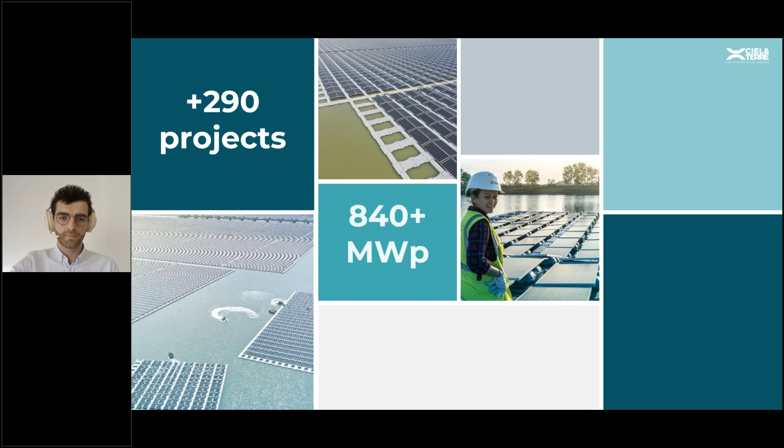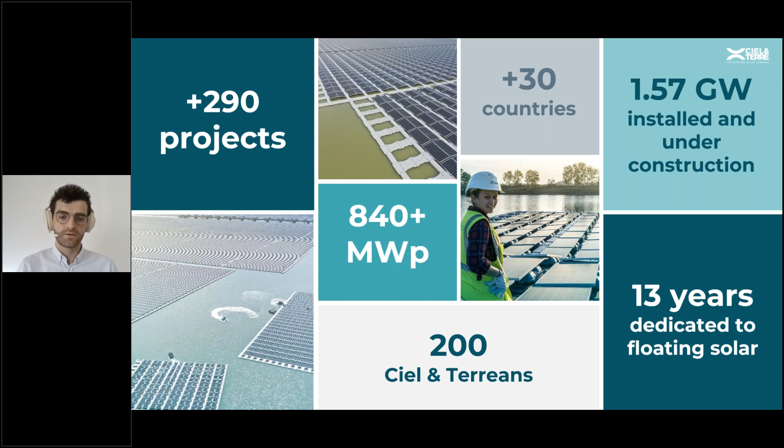Just a few numbers to give you a rough idea of Ciel Terre's expertise: we have around 290 projects installed so far over more than 30 countries, for a total capacity of 840 megawatts. Today, with installed, under-construction, and contracted projects, we reach 1.6 gigawatts so far. Around 200 people are involved in daily activity at Ciel Terre, and we're proud to say we've dedicated 13 years of our time to floating solar.

So now let's move to the first part of the presentation, which is the market observations that we've seen.

The first observation concerns the pond itself, or the basins, as we can say, and it's about the unique character of it. Especially with ponds, you are looking at different site environments. And despite specific characteristics, we can gather those ponds into 4 different categories.

First, we have the static freshwater bodies, which is the historical FPV application, where you could have no waves and freshwater. It refers mainly to irrigation ponds and fish ponds. On this specific segment, Ciel Terre has 12 years of experience and nearly 345 megawatt peak installed.

Next is inner waters, ponds a bit bigger than the one we just mentioned, where we have some dynamic effects as well, with waves coming to the pond and to the FPV array. It refers to quarry lakes, larger fish ponds or irrigation ponds, water treatment or storage ponds. On this segment, Ciel Terre has 10 years of experience and more than 330 megawatt peak installed.

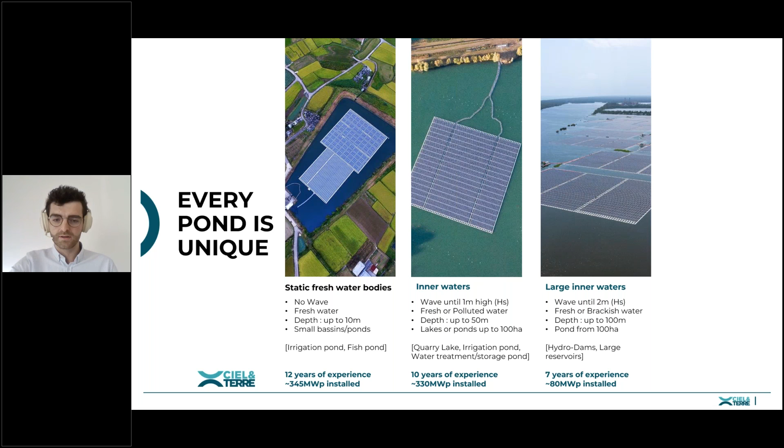Next is large inner waters. It's the same as inner waters but even bigger, with ponds starting from 100 hectares, with more challenges at some point. This represents all the hydro dams and large reservoirs, where basically you could have some brackish water as well. On this segment, Ciel Terre has 7 years of experience and nearly 80 megawatts installed.

Last but not least is nearshore protected - all the protected bays from offshore conditions, with sea lagoons that are open to salty water, where we can find some waves coming at a bigger scale on the array. On this segment, Ciel Terre has 3 years of experience and nearly 90 megawatts installed.

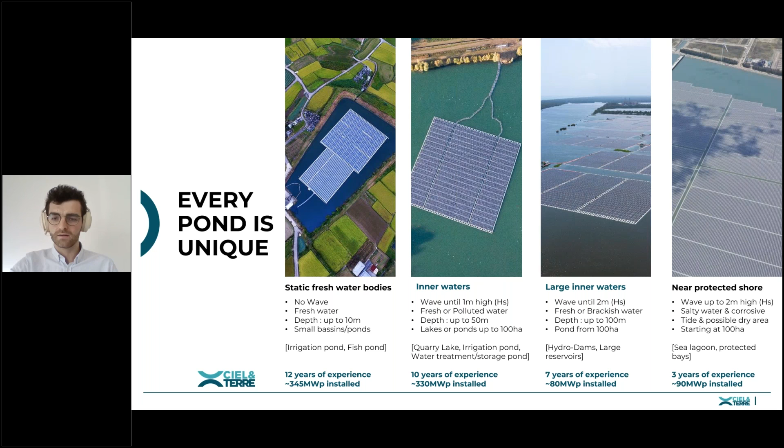Now moving on to the second observation, concerning the trend on the PV side. I'm not going to cover the full history of solar PV cells and solar wafer cells, but I'll give you the latest updates concerning that.

Back in 2010 and 2012, we were considering M0 and M2, which were 156 millimeter cell sizes. This brought 2 types of PV: one was 60 cells arrangement, the other was 72 cells arrangement, which later became half-cut cells - 120 and 144 half-cut cells. At the real beginning of standardization, PV were 1.6 meters by 1 meter, up to 2 meters by 1 meter with the 72 cells.

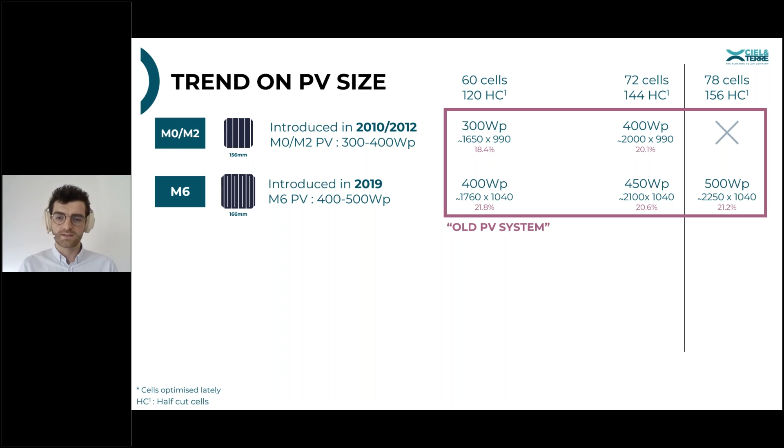Moving on with a few more improvements in PV arrangement and aspects, M6 arrived in 2019 with PV reaching 500 watt peak, with a new format coming onto the market with 78 cells. At that time those PV were considered quite new, but today they're considered old PV systems, as they're not expected to be installed on industrial scale for larger projects.

We're moving now to M10 and M12, introduced respectively in 2020 and 2021, with even bigger module capacity and the same amount of cells, but the cells increased in size, so the PV itself increased in size. For M10, with 78 cells, we have nearly 2.4 by 1.1 meter PV size, around 2.7 meters square, and the PV capacity can reach 620 watt peak for the latest one.

Later with M12, we have a new arrangement of cells on the PV, representing 66 cells. With this PV, we're able to reach today 700 watt peak for a module. At that point the panel also increased in width and length, becoming 2.4 by 1.3 meters long.

These panels are considered a new PV system, so they'll be used on utility scale projects, FPV project scale, and are the main focus of today's presentation as they'll be able to be installed with the solution provided by Ciel Terre.

One of the main drivers here is cell efficiency. Before, with the old PV system, we were around 18 to 20% maximum, and today we are around 21 to 22% efficiency. The higher the efficiency, the lower the LCOE will be - so the better for the PV industry at this point.

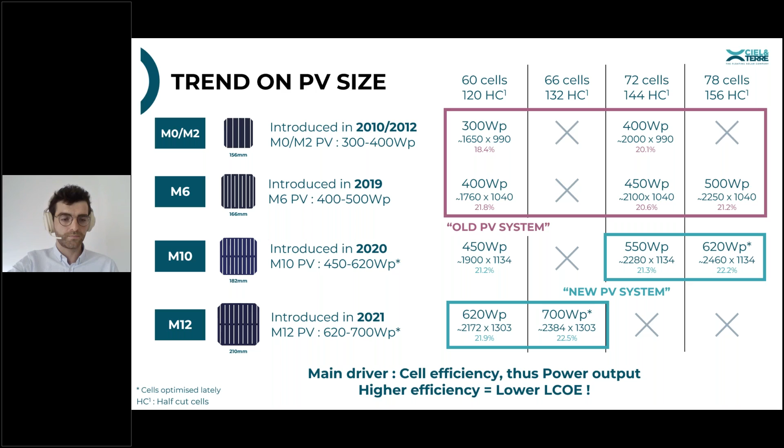Next point and next observation is concerning the FPV system overall and its variety of systems. We have seen multiple types of floating solar systems arriving onto the market, flourishing, and going into diverse kinds of directions. But at some point, the main objective is the same: setting PV power plants above the water surface. For that, let's have a look at this overview of different types of systems with specifically different descriptions and characteristics.

The first one is the float-to-float segment, which is a float combining with other floats, providing a flexible structure with waves and a salty environment, and can lay easily onto the ground.

Then we have pipes and hybrid systems, which can be described as a mix of flexible and rigid structure. These bring as well buoyancy spread and walking stability.

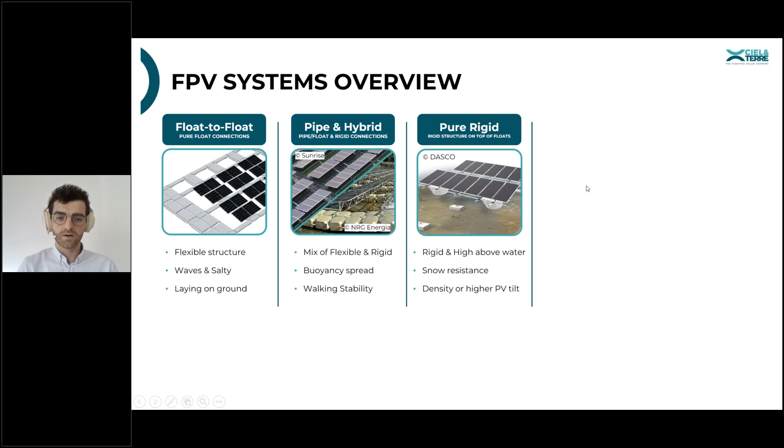The third segment is pure rigid, which is a float set onto a rigid structure, which has high distance above water, can provide snow resistance and density, and has a higher PV panel tilt.

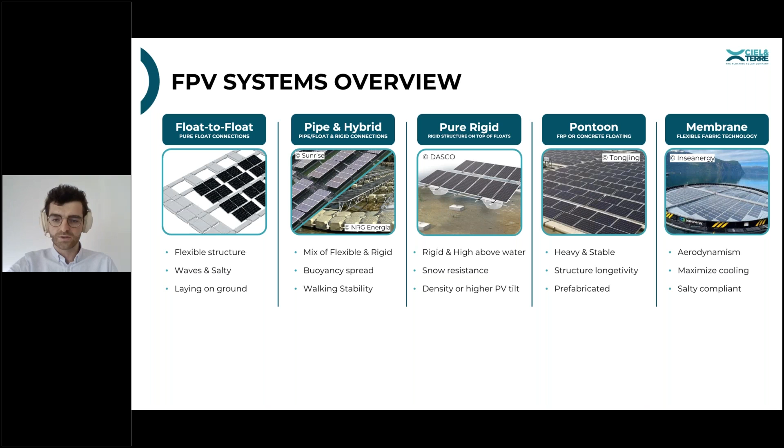Based on those segments, we are able today to give some numbers about the FPV cumulative capacity installed worldwide. Based on internal Ciel & Terre data and consolidated data from third parties, mid of this year, 2023, the overall cumulative capacity was reaching 5.7 gigawatts, counting over 950 projects.

If we go deeper into this number, taking into consideration those 5 different segments, today float-to-float is reaching 70% of the overall market share, followed by pipes and hybrid with more than 16%, and third on the podium we have pure rigid.

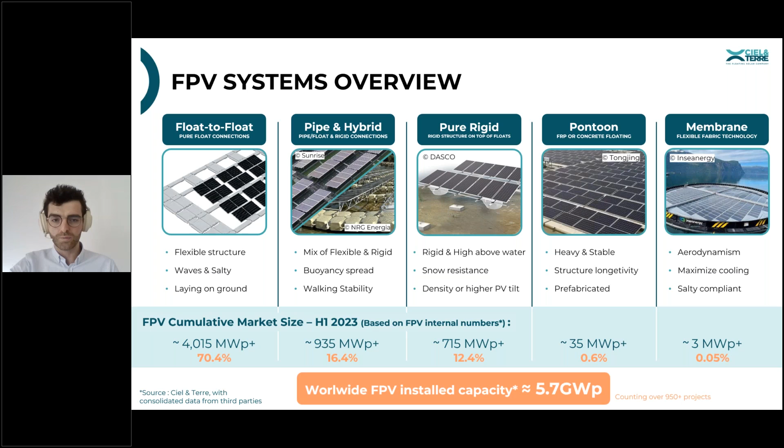With these 5 different segments, we are able as well to have a look at the evolution and how the technology evolved during the time. We'll go back to the first year mentioned in this graph, 2011, where the FPV market was below 1 megawatt, and still at that moment we had several types and kinds of technology on the market.

Later on, in 2015, the market reached 70 megawatts, with more technology coming onto the field. We reached 6 technologies for float-to-float in 2015, pipes and hybrid with 5, rigid was 5, pontoon 2, and membrane still 0.

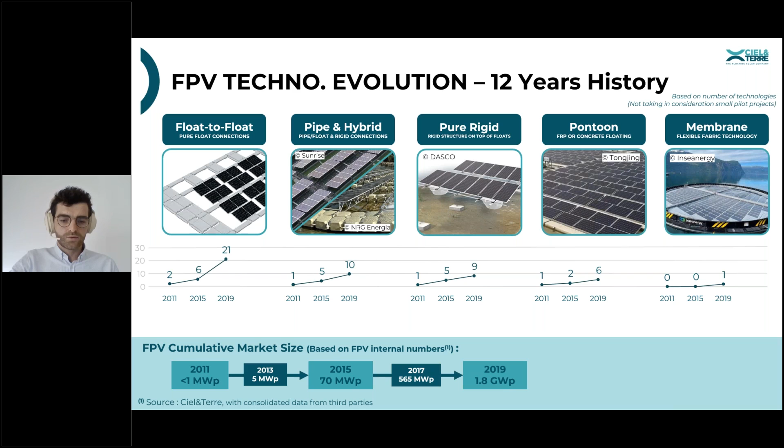Later on, in 2018, it was a milestone year for FPV as it reached and then exceeded 1 gigawatt. PV experts started to say that FPV is the new application for PV, and that it will become the third pillar of the PV industry.

And today, mid-2023, here are the numbers, following the trend we've seen so far from the early beginnings, with a lot of new technology arriving on the market, but not with the same return on experience.

Tomorrow, based on DNV information published in April last year, the capacity in 2025 is expected to reach 10 gigawatts at some point. This shows that FPV is showing market dynamism, but in terms of technology and reliability, that's the main point of discussion.

Because once we look at the actual structures and the floating solar experts, there is always a gap, especially talking about anchoring, and that's why Ciel & Terre has the main expertise on the field. I'll outline it a bit later during the presentation.

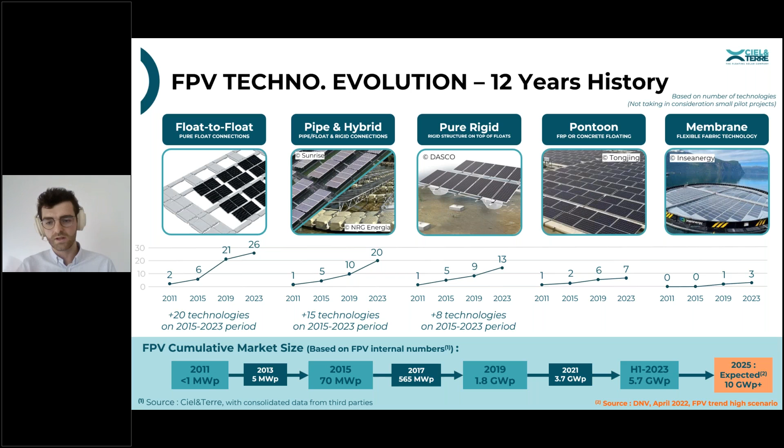Now let's move on to the actual solution we can provide today, considering where we started. It all started in 2011 with the Classic version, the first industrial scale FPV structure with a fixed tilt of 12 degrees. At the end of 2011, Ciel & Terre reached 3 projects installed with this technology.

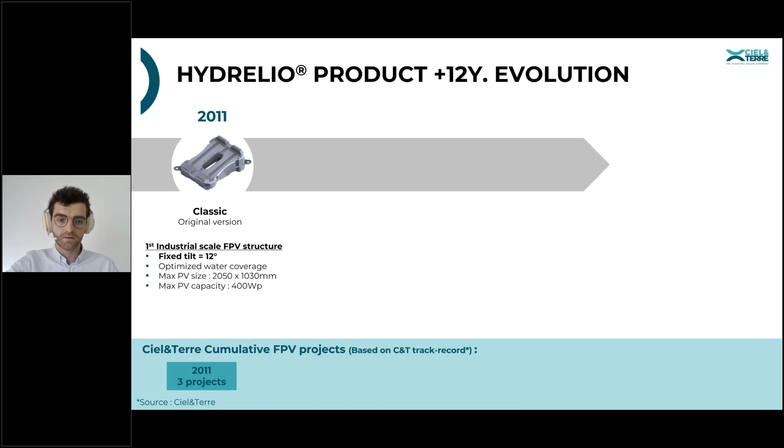Later on, the Equato version was unveiled on the market for equatorial regions, bringing a fixed tilt of 5 degrees. By the end of that specific year, we reached 30 projects installed.

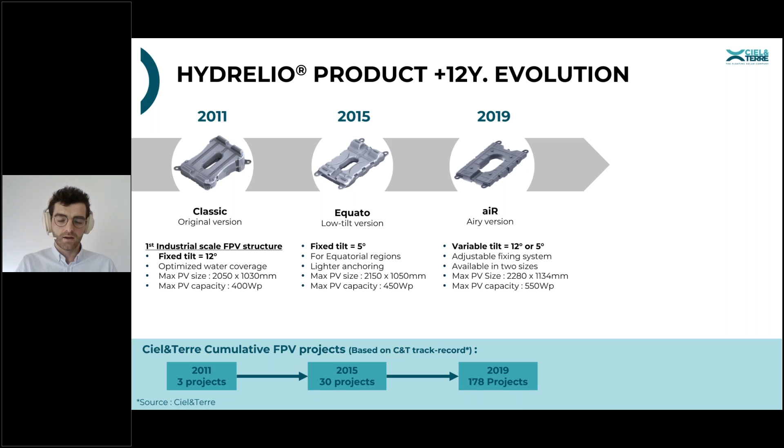Later, it was replaced by the Air version in 2019, which is a variable solution with variable tilt and adjustable fixation that can cope as well with M10 standard PV size. And at that time in 2019, the number of projects was reaching 170 plus, mostly installed in Asia.

Today, we are proud to propose the new, most versatile option, which is Optim floats. It has variable tilt size, variable float size, and is adaptive to specific M10 or M12 PV modules. The number of projects grew significantly in recent years, reaching around 290.

Talking about track record, starting in 2011 with Classic, the track record today is 430 megawatts, though it's no longer commercialized because it's been replaced. Equato was 25, and Air is still 385 megawatts. Currently in the pipeline with the Optim solution, there is more than 730 megawatts peak.

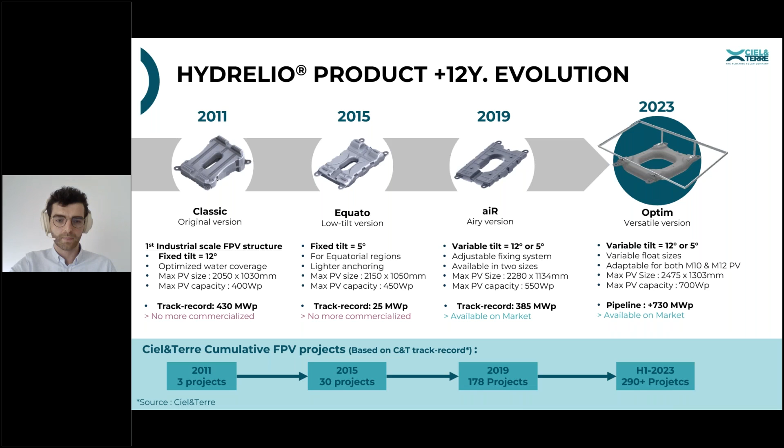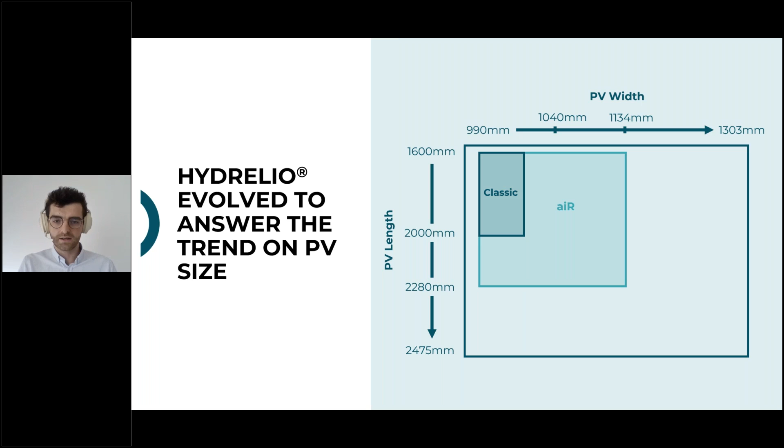After Air came to the market, here is the compatibility range for the Air product with specific PV sizes. Now that we're moving to M10 and M12 PV sizes, Optim is the solution, and it can cope with this very large and very long PV found on the market.

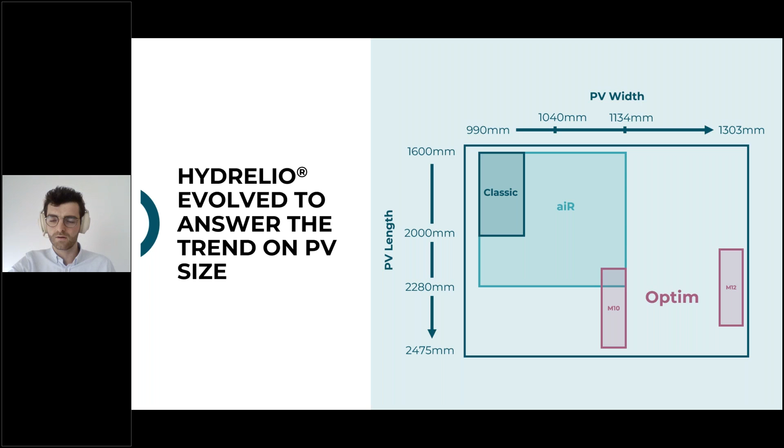But what's behind Optim? Let's have a look together.

Optim System is a float-to-float technology based on 12 years of experience and evolution, with strong track record and bankability. It's a float-to-float system combining several types of floats with PV installed in landscape mode, adjustable in terms of angle — the module can go from 5 to 12 degrees.

It can cope with different types of environments, combining several floats. It's flexible to adapt to inshore and nearshore conditions with waves as well as wind that can blow quite significantly at the back of the PV. It can reach resistance up to 210 km/h, which is needed in some typhoon areas where there's a bigger amount of pressure requiring a specific solution.

It can cope with PV modules from M10 to M12, with PV up to 700 watt peak, and will for sure gain efficiency to reach 800 watt peak.

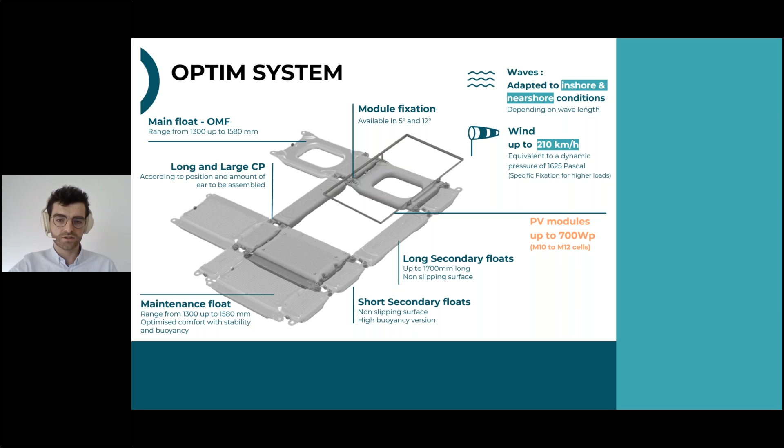It can also be easily configured in several rows, a concept brought back from 2015 when Equator arrived on the market. We place one maintenance column every 1, 2, or 4 rows of PV — that's what we call the several-in-a-row configuration.

It can adapt to specific temperature ranges as well as snow load, especially in some regions, and it can cope with corrosive and UV exposure in specific challenging environments.

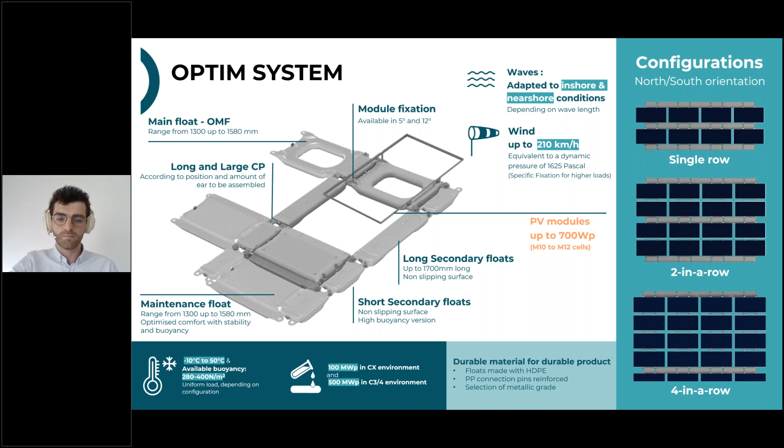One last part is about the material, which is really important at Ciel & Terre, as we ensure the product can be reliable and installed for more than 30 years. So we have a close look at what we select as raw material.

Talking about evolution, Optim features a new floats overlapping design to make the maintenance column better for safety.

It brings Hydrelio float-to-float technology closer to hybrid and rigid working stability, while keeping a high degree of flexibility to cope with waves. It allows better weight repartition on the maintenance column, as well as ease of maintenance and operation.

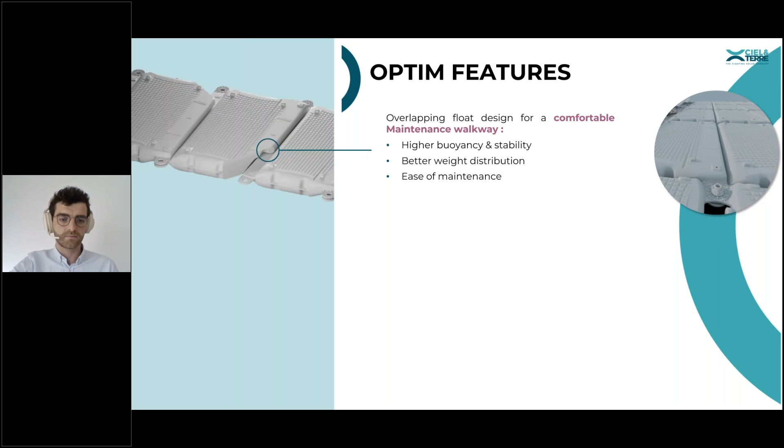Columns can be easily added to the power plant without compromising the overall array density, while adapting to heavier string inverters placed directly onto the floating array, or DC boxes that can be placed the same way on this specific maintenance alley.

This Optim paves the way to an upgraded float-to-float structure, with the latest PV compatibility from M10 to M12, with latest PV weight compatibility up to 38 kg, with improved thickness repartition during the blow molding process, with better safety as mentioned with the maintenance floats concept, and with adaptive floats to cope with PV tilt and dimensions.

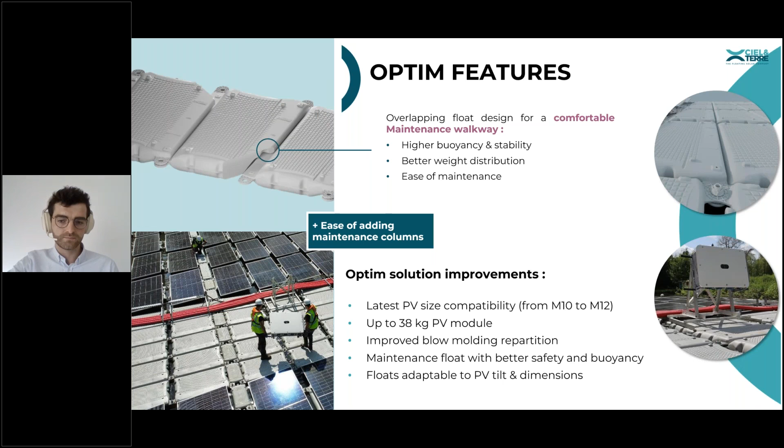Now that we've talked about the solution for the market, Ciel & Terre adapts its product to market trends, improving the system, but also adapts to site constraints. I want to hear from you about what you've faced during FPV project execution. So here is a quick poll to understand where you find the different limitations.

Thanks for voting. I see that site constraints came first in the poll, followed by anchoring issues and environmental issues. It's true that those specific problems need to be handled with care, and Ciel & Terre is making everything possible to address those points. We'll see specific cases now with the presentation.

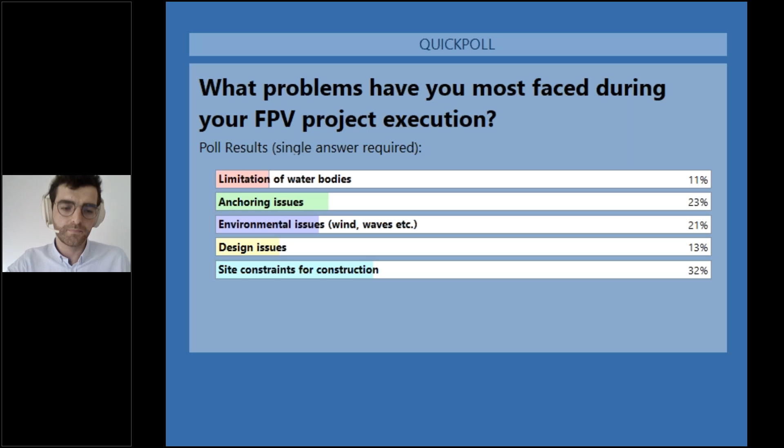As mentioned, we need to overcome some site challenges, and this is the last part, starting with anchoring. Site characteristics are essential to lead to unique designs, and at some point to innovate and think out of the box, as you'll see during the presentation. At times we can provide a unique anchoring design to the customer depending on the site requirements.

Let's have a look at the Maiwelt Project in Germany. It was installed in 2019 on a quarry lake, reaching a capacity of 750 kilowatts. On this specific project, Ciel & Terre's scope covered project engineering, supply and procurement of the floats and anchoring, as well as construction.

Challenges on this specific pond were that the quarry was still in operation, so the location of the power plant mattered a lot, as we didn't want to interrupt the actual activities on the lake. Second was the depth of the reservoir, which was 40 meters at the FPV location, and at that time, for a project of this small capacity, it was quite expensive to install anchors at the bottom. Last was the impossibility of installing bank anchoring on the west side, as quarry activity was still running specifically on that part of the pond.

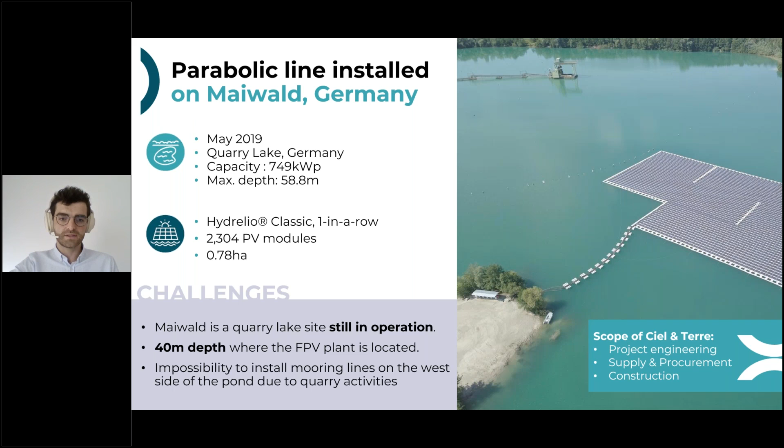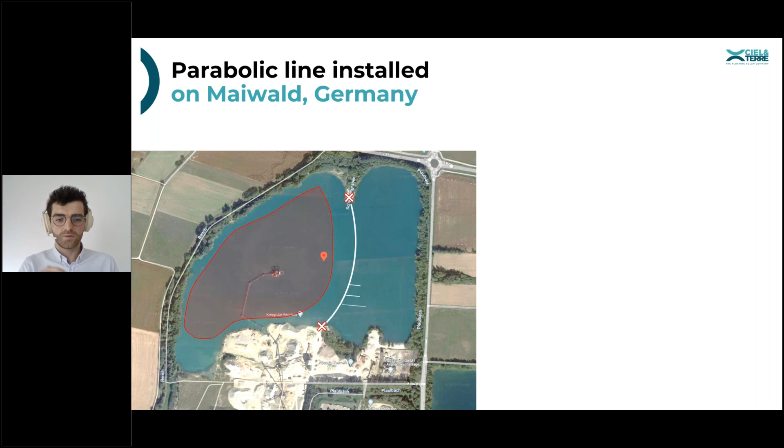So we came up with a new type of system called the parabolic line. The concept is that we have a main line set between two anchor points, and bridle lines that connect the main line to the floating array's anchoring system.

This brings several advantages. First, the actual solution avoids disrupting the activities, meaning we didn't need any bank anchoring or bottom anchoring specifically on the west part. It required fewer anchoring points, as you can see on the screen. It was quite quick, so there was no impact on the installation duration. And depending on soil conditions, it could be less expensive than traditional mooring. That said, a design like this must be adapted to site constraints and construction feasibility. It looks simple on the screen right now, but it's more sophisticated, involving specific simulation and calculations.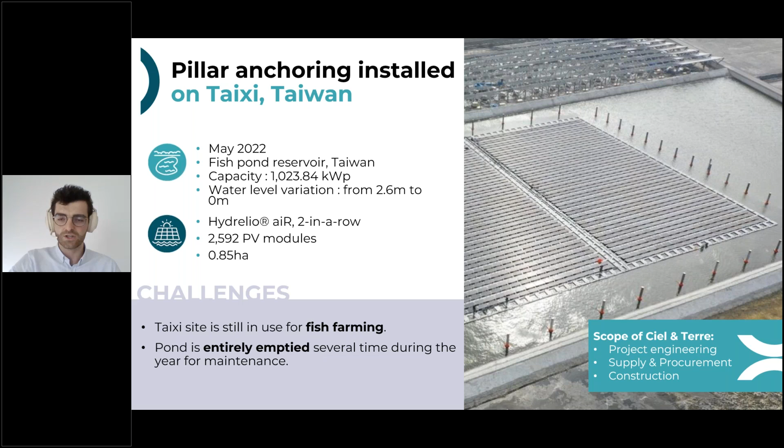On this specific project, the challenges were that it was still in use by fishermen catching and harvesting fish, so part of the pond couldn't be used for the installation of the floating power plant. Second, the pond could be entirely drained for several reasons, such as maintenance, operation, or dredging. Last, the banks were made of concrete and couldn't be used for the anchoring design of the power plant.

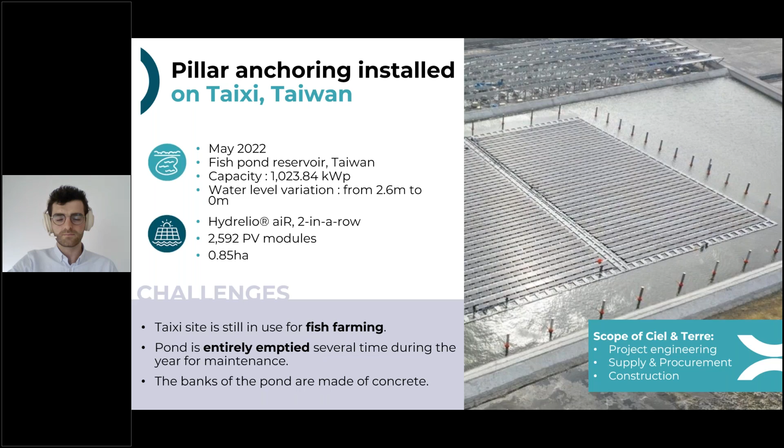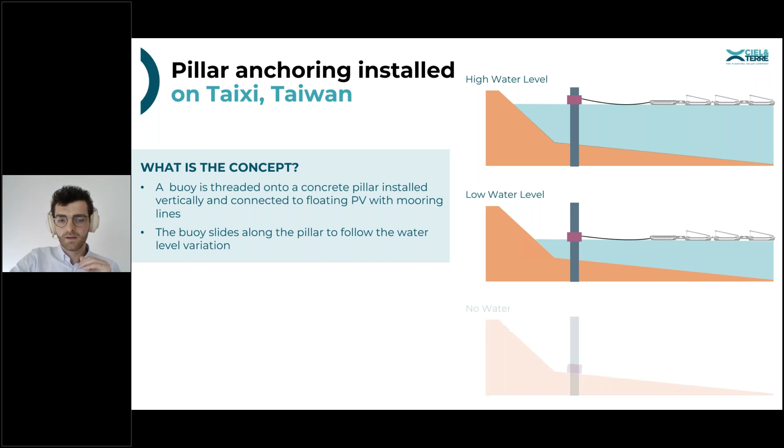So what we brought to the table here is called pillar anchoring, which is a concrete pile set vertically into the ground, on which we have a buoy that adjusts to the water level and connects directly to the anchoring equipment on the floating solar array. The buoy slides along the piles to cope with water level variation, and it can even go to no water level, as it strictly follows the water elevation.

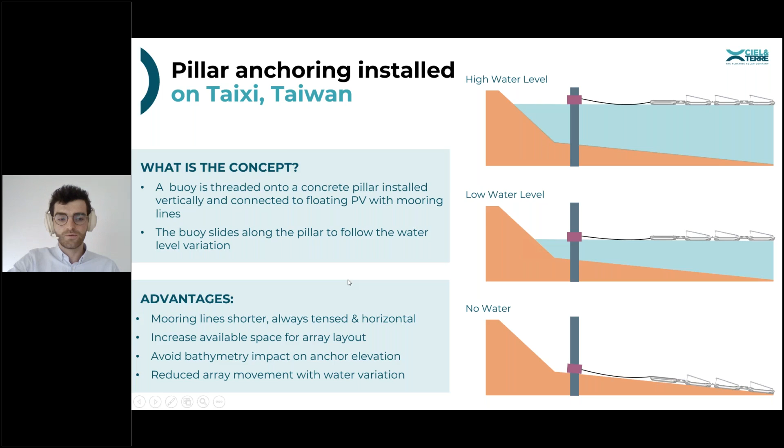It brings several advantages. First, the mooring line is always taut, horizontal, and shorter compared to traditional mooring at the bottom of the reservoir. It increases the overall space for installation on the floating array, so capacity was increased with this specific anchoring scheme, and it avoids bathymetry impact on the anchor elevation.

This project was installed in 2020 in a nearshore application with industrial conditions. The project reached 88 megawatts so far, and the actual scope of work for Ciel & Terre was project engineering, supply and procurement of the floating structure only.

Specifically on this project, challenges were quite important. First, we can mention the corrosivity of the environment, as well as the salty water coming onto the plant, corrosivity from the industrial area. We can also mention that the tide comes twice a day to the pond, meaning the plant sometimes lays directly onto the ground. It's also a typhoon area, so it has to cope with high wind and severe environment.

The last challenge we name here is the soil condition, which was not so easy to handle.

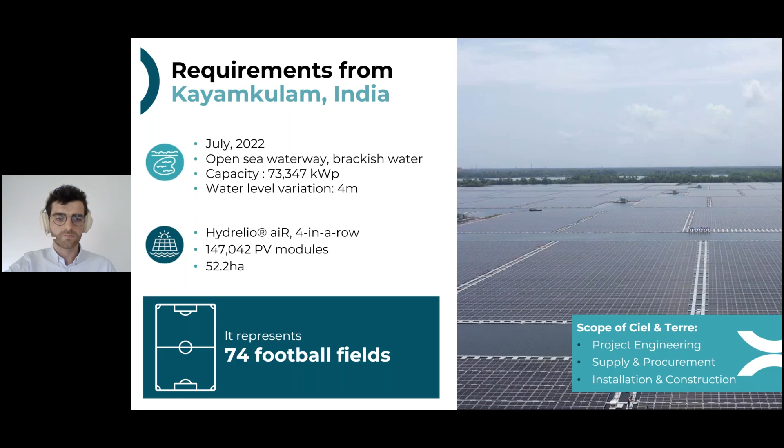First challenge here was the large quantity of floats to be produced and delivered in a short timing while keeping high quality standards. The strategy from Ciel & Terre was to make the floats ourselves. We invested in a specific manufacturing line to produce the floats close to the site and deliver the quantity needed for the project in time.

About the quality control, we have strict quality control in Ciel & Terre that we apply to our manufacturers, and that was also applied to our own manufacturing line, with real-time tests and specific inspection during production and also once the products are delivered on site.

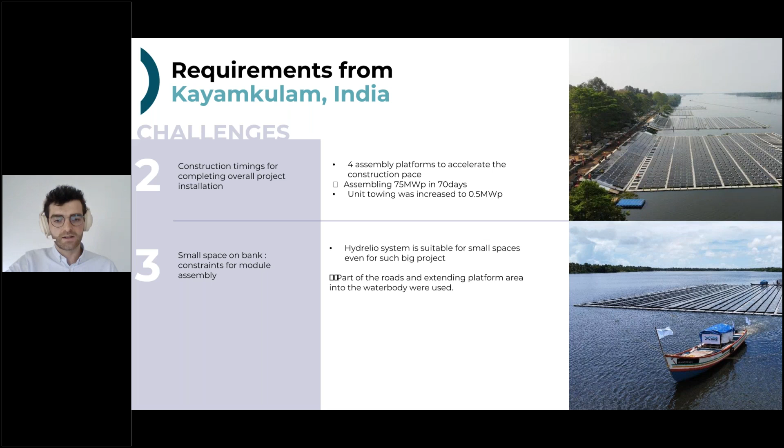Here specifically on this project, we had restricted areas, so we were constrained with the sites. But as Hydrelio is a float-to-float connection that is very modular, we were able to install it in a small space, taking part of the road for storage and extending the platform area over the water body to assemble the structure.

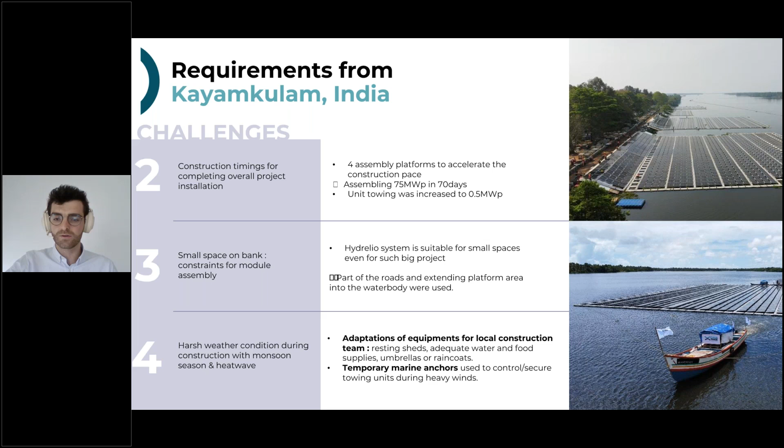Last one is about the harsh weather conditions we saw on site, with monsoon and heat waves. We adapted equipment for the local construction team, and eventually provided temporary marine anchors for the towing units, because those units were directly drifted to the final location, which was 3 kilometers away from the actual assembly lines.

This ended up the presentation for today. As a summary, innovation in floating solar aspects intervene at different stages.

First is anchoring. We can name anchoring, product, construction, as well as project. But what is essential for Ciel & Terre is that the anchoring always comes along with the floating PV structure.

This is something essential for getting bankability and a reliable project, basically. Because at Ciel & Terre, we ensure there is a specific study and specific anchoring team that has 13 years of expertise and experience over 290 projects overall.

They face multiple types of computational fluid dynamics to better understand the behavior of the plant, correlated with wind tunnel testing, as well as anchoring tests performed in real scale conditions with more than 100 floats, plus monitoring of installations to keep an eye on the behavior of the plant throughout the years. So all of this is fundamental for us to keep the floating project bankable and reliable.

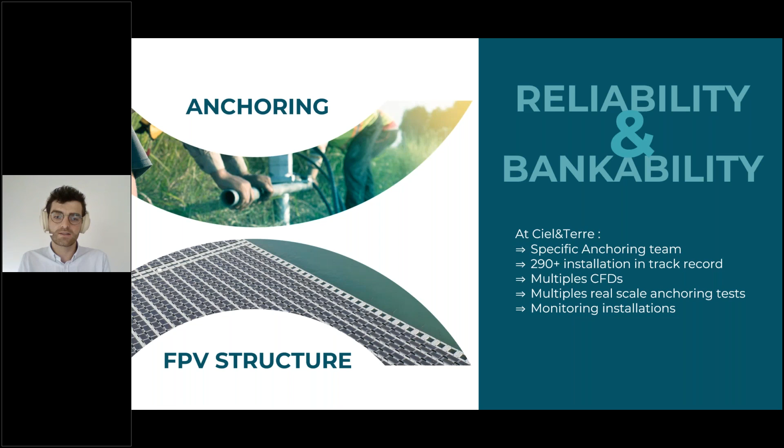Thanks for listening. Hope you enjoyed the presentation. Now you can go to the Q&A session.